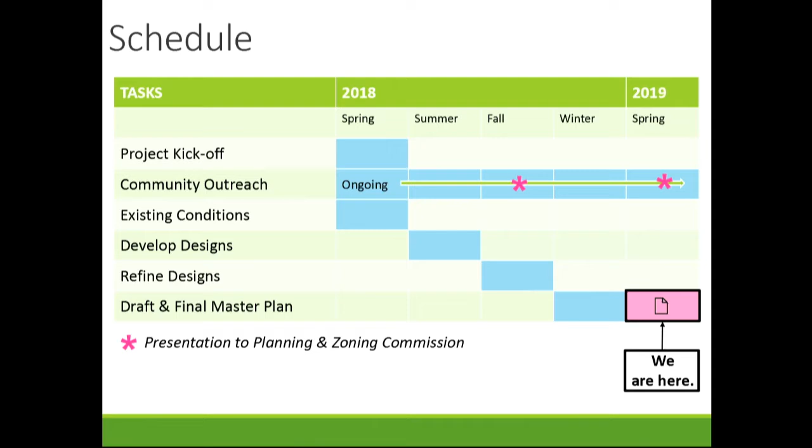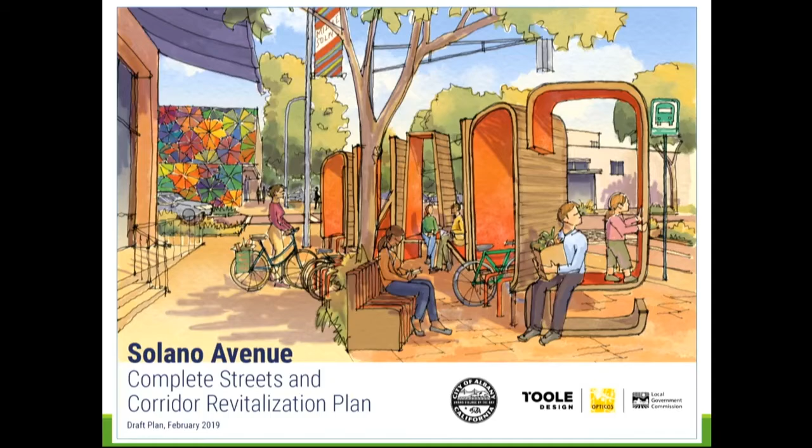So what I'm going to do now is provide you a walkthrough of the draft plan. The Solano Avenue plan is the culmination of about a year of outreach and planning work.

All of the elements have been pulled together into the draft plan, which includes an executive summary, a brief introductory chapter that discusses the process as well as the purpose of the plan and community goals. We also, in chapter 2, look into the existing conditions as well as the proposed corridor design and design elements. Chapter 3 is a unique chapter that provides a streetscape design palette.

These are ideas for the city and the community to think about as they work on implementing the plan. They are examples from other communities and include an array of design elements. The 4th chapter looks at implementation, so I'll touch on those as well in a bit more detail.

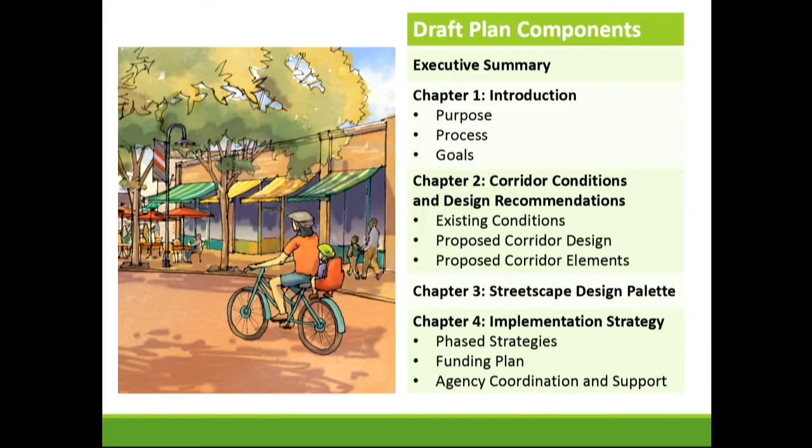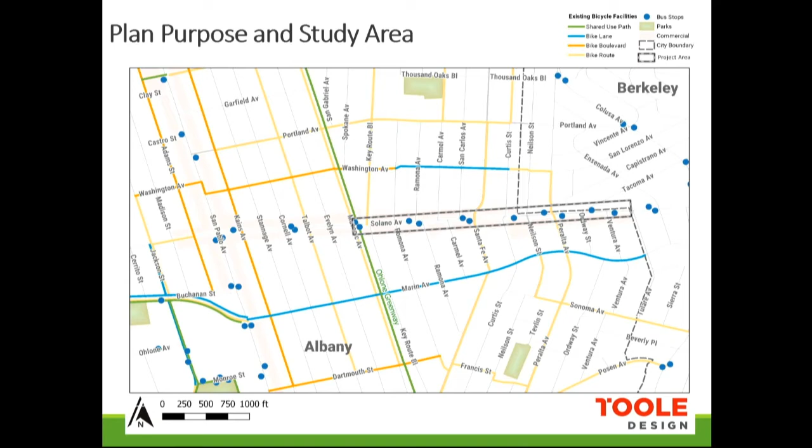The plan study area is Upper Solano Avenue, defined as Masonic to Tulare. This encompasses all of the right-of-way within the city of Albany, and to the east of the corridor is a bit of buildings in the city of Berkeley, but the city of Albany does own the right-of-way in that area as well. The plan was developed through multiple community outreach efforts.

We had a kickoff open house in May of 2018, and we also met with the Community Advisory Group at that time. In late September/October, we took the draft corridor design back out to the community with an event at Flowerland on Solano Avenue. We also had a pop-up event on Ramona Avenue, which illustrated hands-on some of the corridor design features.

We've also met with you, the Planning and Zoning Commission, and the Traffic and Safety Commission. City of Albany staff has been obviously very involved, but we've also been meeting with City of Berkeley staff, recognizing that this corridor plan does touch on some of their property as well.

We've also had a great team comprised of Toole Design, Opticos Design, which is a landscape and urban design firm, and a local government commission and outreach firm. So we drew upon all of the innovative ideas from the 3 firms and best practices in the field of planning, engineering, and urban design, and pulled that into the plan as well.

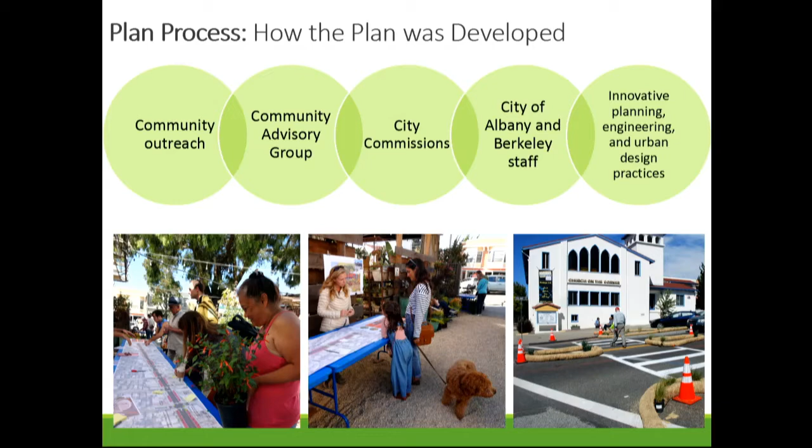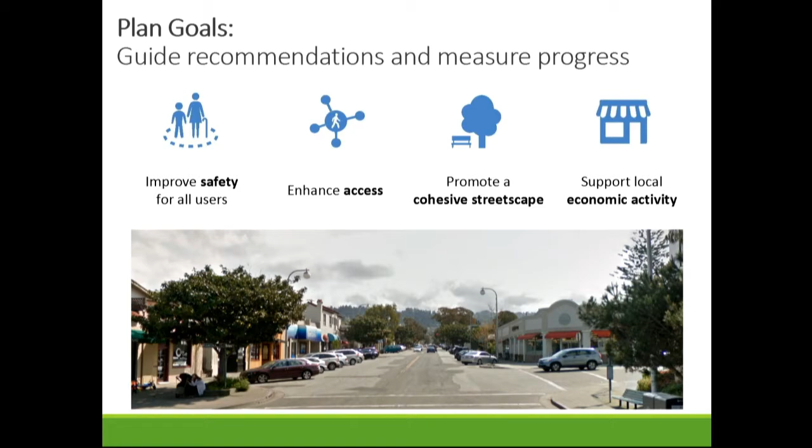The plan goals are to improve safety for all users, enhance access, promote a cohesive streetscape, and also support economic activity. These goals really came from the feedback that we got from the community throughout the planning process.

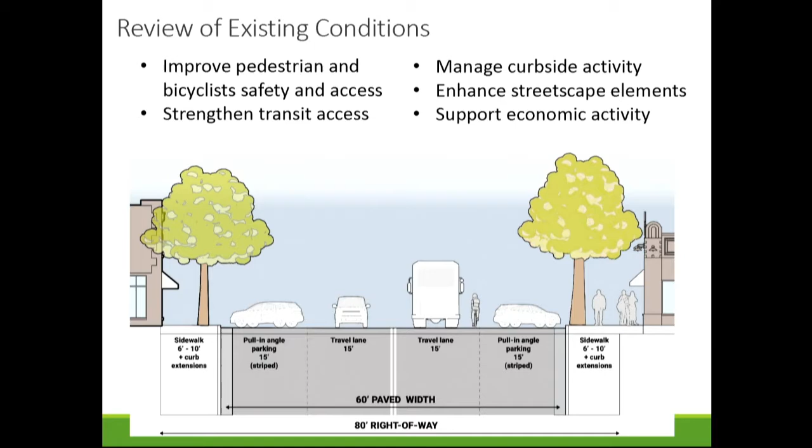Currently, there's a sidewalk that's at maximum 10 feet, and then pull-in angle parking at about 15 feet, and about 15-foot travel lanes on both sides. The existing conditions also take a look at the current conditions for walking and biking along the corridor, transit access, curbside activity, current streetscape elements, as well as an interest in supporting economic activity.

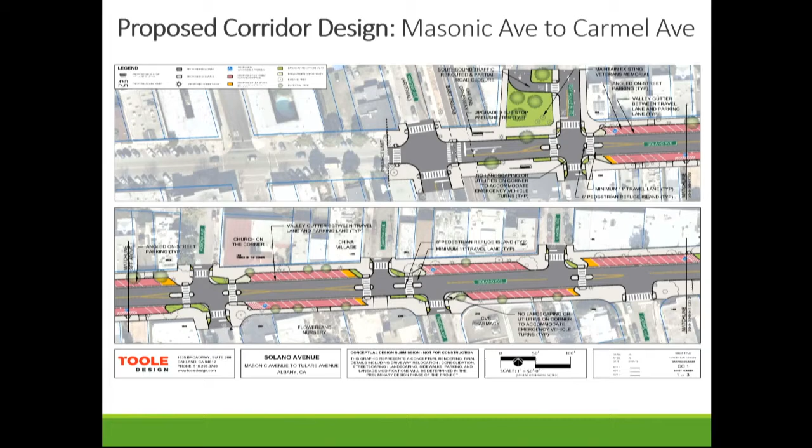This is the proposed corridor design. It encompasses, like we said, Masonic to Tulare, so it's broken up into 3 pages in the plan. The main themes of the corridor design are to enhance safety of pedestrians, which is where you'll see we've restriped many of the crosswalks.

We've enhanced mobility and accessibility by repositioning the curb ramps. There are also pedestrian refuge islands proposed for crosswalks that are quite lengthy. And we've also identified streetscape elements throughout.

So possible new tree locations, as well as different flexible spaces that could be used for public spaces like parklets or buslets. They could be used for in-street bike corrals or motorcycle parking. This is really an opportunity for different uses along the corridor in this area.

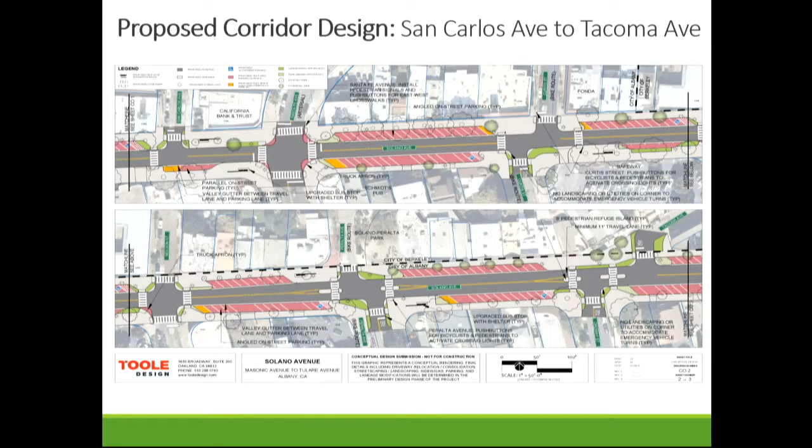This also encompasses extending the curb ramp so that narrows the travel lane for pedestrians and limits the exposure time as they cross the street, which hopefully limits their conflict with cars. We also look to widen the sidewalk throughout the study area, especially on the south side where there are many pinch points.

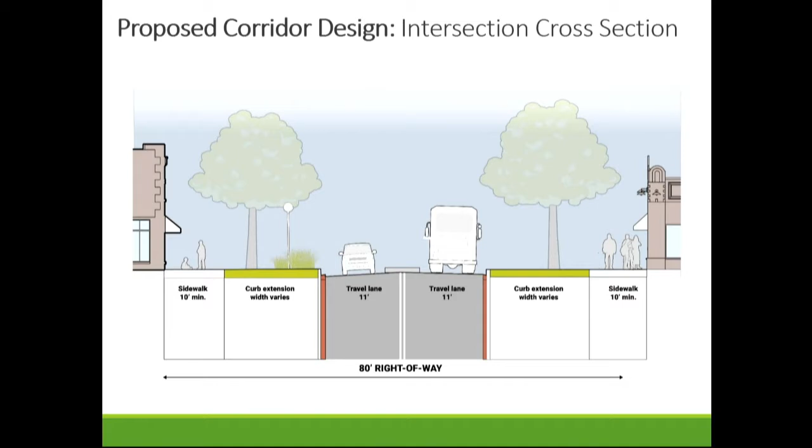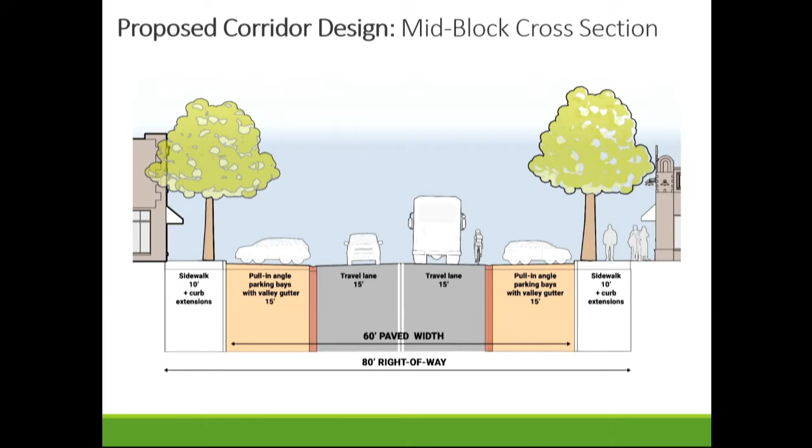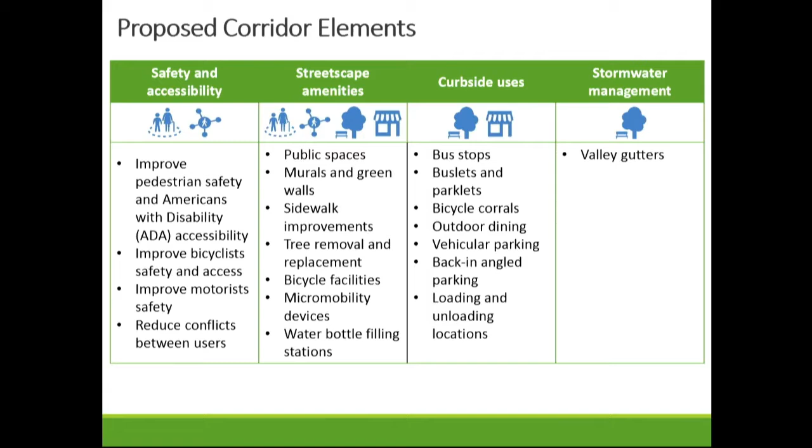We're also really excited to include a whole assortment of corridor elements that touch on safety and accessibility, streetscape amenities, curbside uses, and stormwater management. I'll touch on a couple here, but keep in mind there are more than I go through.

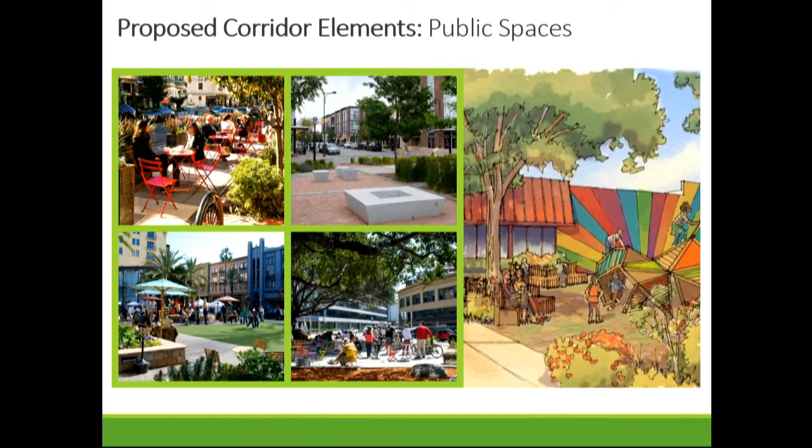One of the corridor elements we really highlight are public spaces. This image on the right is a possible new public space at Key Route Boulevard. There, we propose rerouting Key Route, which opens up a nice space that could be used for a park or other gathering place. We also identify other places for public spaces throughout the corridor.

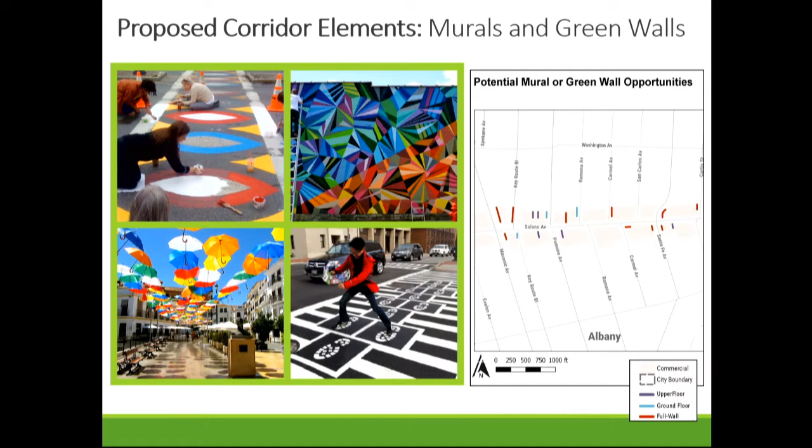We also identify opportunities for murals or green walls. These are currently blank walls that could be brought to life through murals from local artists, or could have green or living walls installed to enliven Solano Avenue and bring character to the corridor. We've also identified flexible spaces throughout the corridor.

When you look at the corridor design, keep in mind that spaces allocated for vehicle parking could also be used as flexible spaces for on-street buslets or parklets, similar to what's outside of Hal's Coffee in Lower Solano Avenue. They could also be used for outdoor dining at popular restaurants, and could be connected to bus stops with some really nice amenities.

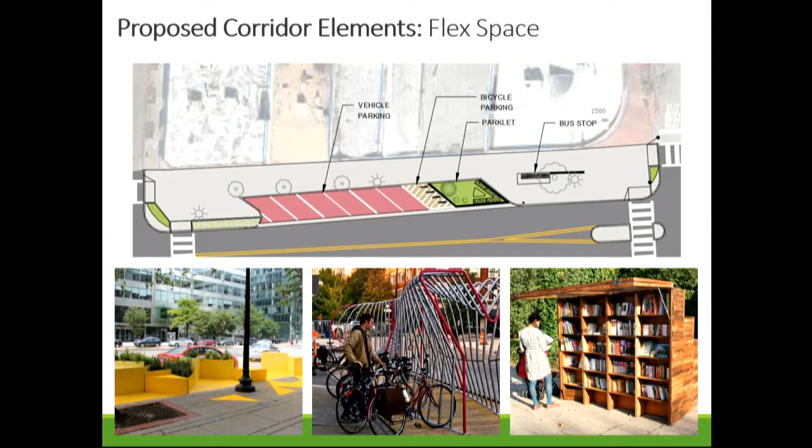These examples below are creative public spaces, and the one with the books is actually a creative bus stop. So you can use the space in a lot of different ways, including buslets and parklets as I mentioned.

Sidewalk improvements are a key element of this plan as well. This is on the south side of Solano Avenue. As I mentioned, there are many pinch points, and in many locations, trees have uprooted the sidewalk, causing tripping hazards and difficulties for people with mobility impairments.

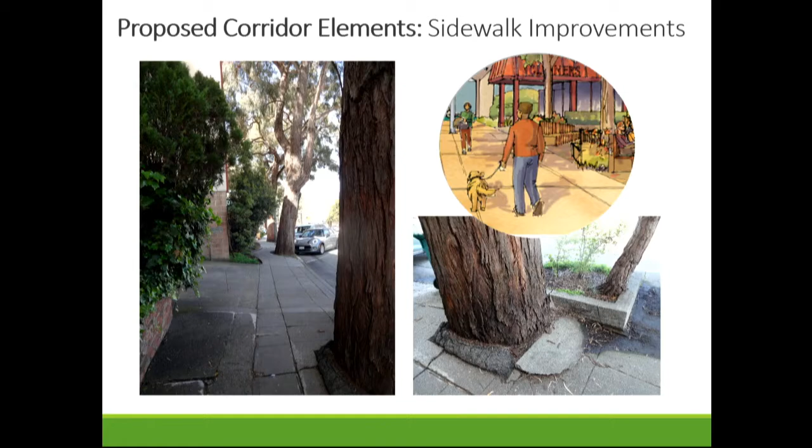So the city is also, in tandem with this project, working on a tree inventory. A certified arborist has been hired to look at the different types of trees on Solano Avenue and provide feedback on which trees may be candidates for removal or which should remain, and what would be ideal urban streetscape trees to plant in the future.

We also address bicycle facilities in the proposed plan. The policy guidance the city has provided through the general plan and active transportation plan is that bicycle facilities should be accommodated on Marin Avenue and Washington Avenue, both parallel to Solano. So our plan focused on providing bicycle amenities across Solano Avenue.

At Peralta Avenue and Curtis, those are both identified bike routes. We've proposed enhancements such as rectangular rapid flashing beacons - the top right picture shows a beacon in Berkeley. This provides enhanced visibility for bicyclists as they cross Solano Avenue.

We've also identified different locations with flexible spaces for in-street bike corrals. You'll see a photo of that down below as well.

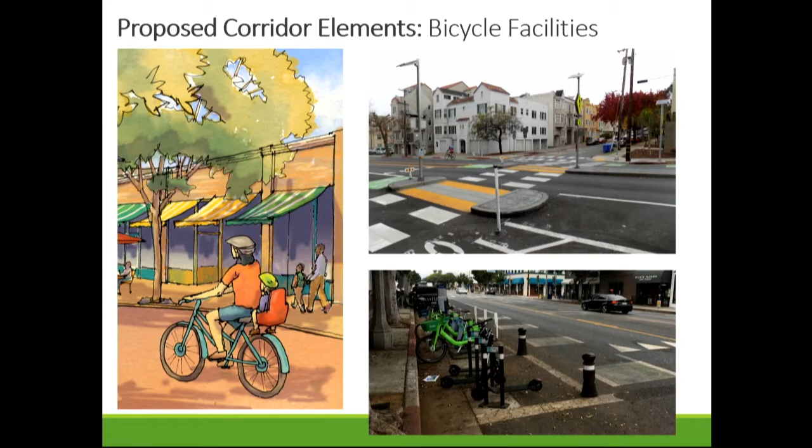For parking, the current design increases the number of parking spaces. This is largely due to an analysis from AC Transit recommending removal of 3 bus stops - stops that don't have high numbers of boardings or alightings - so we're able to capture those and use them in a variety of ways, including regular vehicle spaces. We've also added 4 accessible vehicle spaces, including 2 van-accessible spaces, and 13 of these flex spaces. These are all new additions to the corridor.

There's also been a lot of conversation about the possibility of exploring back-in angled parking as part of this plan. The feedback city staff received from the city council is that this is an element that can be considered as part of the next stage of design work.

Right now, this is very much a concept design. In order to implement this plan, it would need to move forward to engineering design, meaning that while all these recommendations fit within the right-of-way, it would get a bit more technical before it could be implemented on the roadway.

The city is interested in pursuing the possibility of a back-in angled parking demonstration to get more community feedback, which could then be incorporated into the next phase, the 30% engineering design phase.

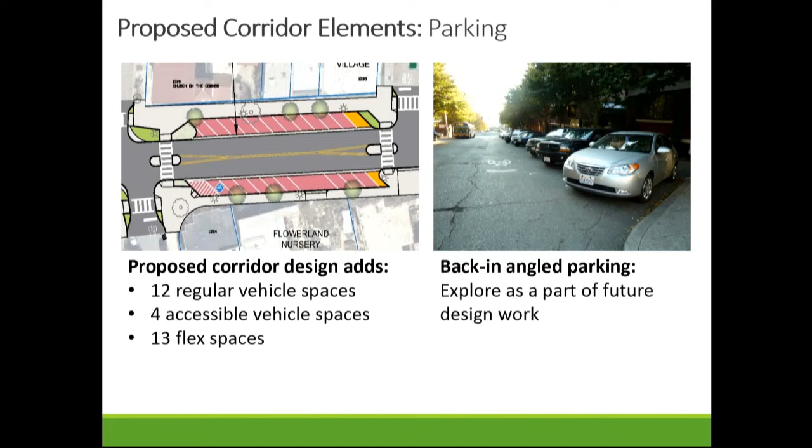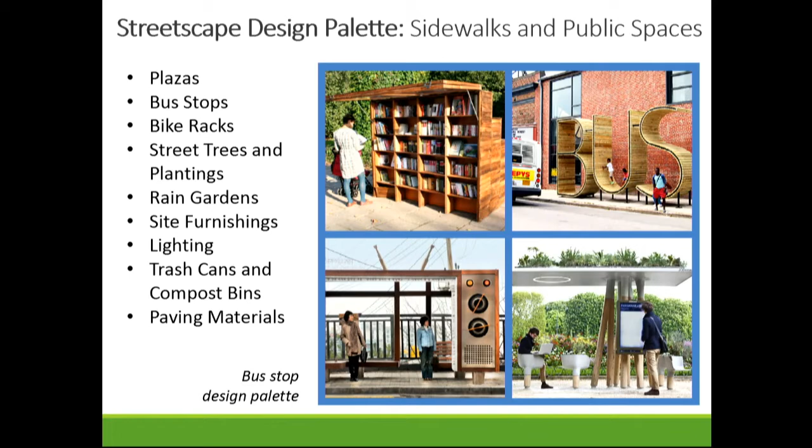We also have a lot of recommendations around sidewalks and public spaces, including the design palette for bus stops as well as rain gardens. There are many locations throughout the corridor identified in green on the corridor design that could be landscaped, which can be expensive to maintain. So there are also opportunities for rain gardens, which provide really high quality stormwater management but aren't as expensive to maintain as fully landscaped medians.

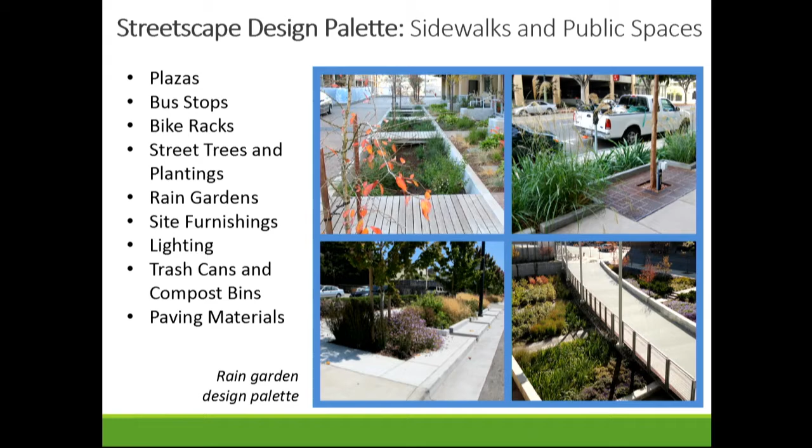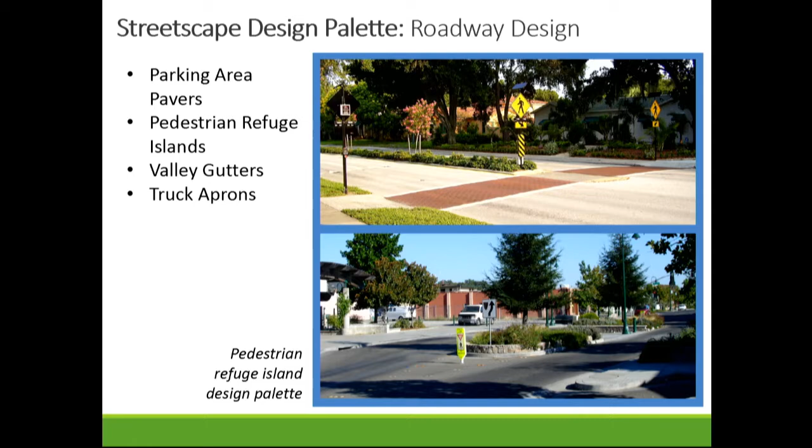For the roadway design section of the design palette, we provide some examples of pedestrian refuge islands. Throughout the corridor, these are proposed to limit pedestrian crossing distances and exposure, and here are some examples of different types.

We also recommend the use of truck aprons—raised, paved areas at intersections. They're quite uncomfortable for personal vehicles to mount when turning, but no problem for larger trucks or emergency vehicles. These are recommended for locations where we see high truck volume. We used a system called AutoTurn to analyze whether trucks can make this turn, and they are able to with the addition of truck aprons. This also serves to slow down and act as a traffic calming element for motorists.

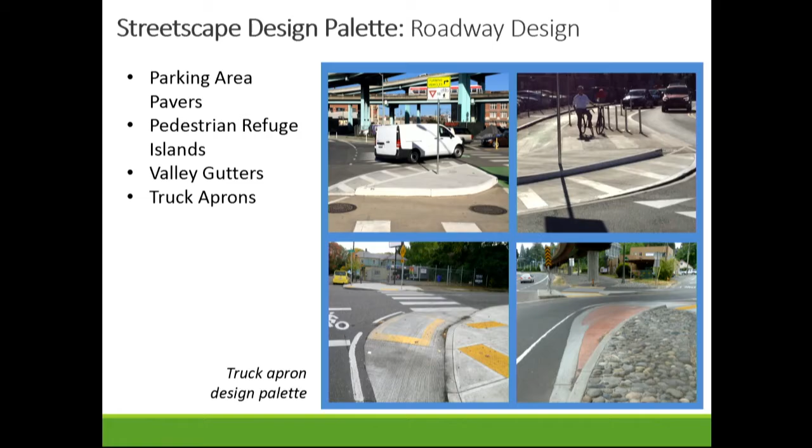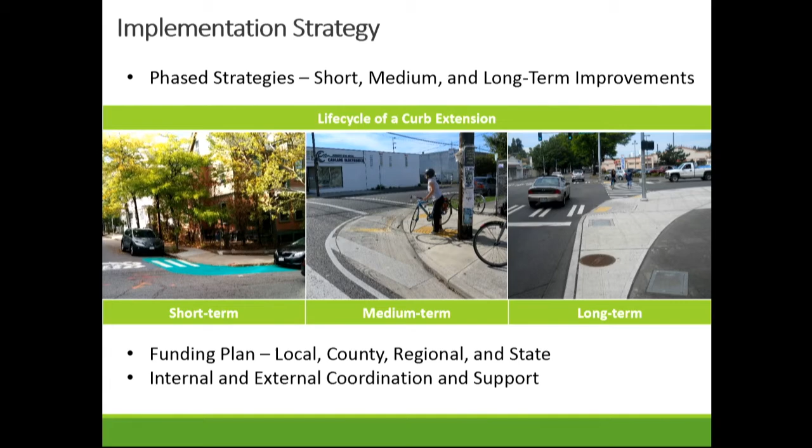To give you a sense of where we are and where we're headed, the public comment period is currently open on the draft plan. It opened on the 11th, as Ann mentioned, and will close on the 11th, so we have a month of public comment. We encourage all community members to provide comments to city staff about the plan, as well as commissioners—don't feel like tonight's your only time to share feedback.

As I mentioned, we'll be going forward to the Traffic and Safety Commission, and then the plan is tentatively scheduled to be reviewed by the council on the 15th.

After the plan is adopted, as I mentioned, this is very much a concept design, so the corridor design will need to move forward into an engineering design. This is very typical for planning projects like this—the city has an example with the San Pablo Avenue plan, which started with concept design and is moving to the engineering phase. The city will be working on securing funding to pay for the engineering design work, and that will be the next step in this process.

The plan can currently be found on the SolanoCompleteStreets.org webpage, and this is also Ann's contact information—you can send comments her way. Thank you very much.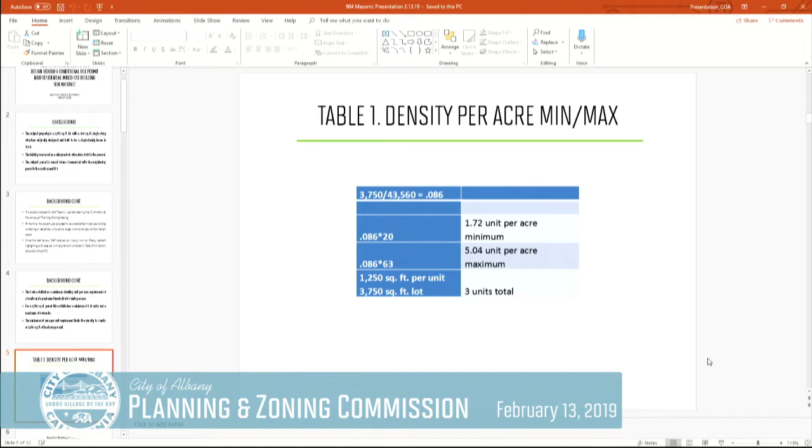So let's see, sorry, can you talk us through what we're seeing here? 1.72 units per acre. Yeah, so basically, if you took a 3,750 square foot lot, your minimum density is 1.7 units per acre, that's the minimum. Your maximum is 5 units per acre, and then again, you still have all these other development standards you're looking at in terms of lot coverage, building height, floor area ratio, off-street parking.

And just to clarify, two questions. One is when we round up, 0.5 and above, we round up in terms of the minimums. Is the point of that to make sure people don't underdevelop lots so they don't put one huge single-family home on this lot? For example, you have to at least put 2 units on this lot?

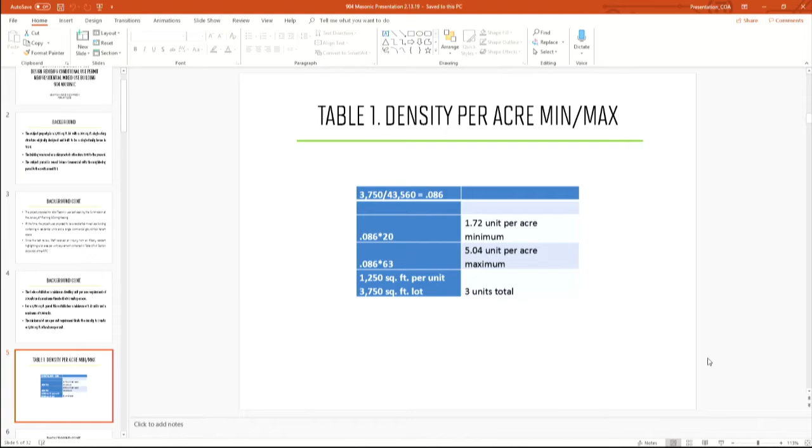Is there any discretion, or is that something that can be waived or modified by the commission, or is it black and white that you just have to comply? In the context of your discretion, you would be able to work through that. But there's a certain sort of certainty that somebody's coming in and says, here are my bookends of density allowed on this site.

Just to clarify, it's not actually 1.72 per acre, it's 1.72 per 3,750 square feet. Correct. So on that lot, you would need a minimum of 2 units, up to 5. You'd be entitled by right to a minimum of 2 for new development.

Well, I can see that might be appropriate for the commercial districts, but having a minimum lot area per dwelling unit is not necessarily appropriate in the residential districts, right? You can say that. If someone had a large lot in R3, and there are some, and they only want to put one home on it, that happens all the time. There are many R2 lots in Albany that have one home on them.

Spoiler alert: at the next meeting you'll actually have 2 duplex applications before you, on 2 different properties in town. Would they be affected by any of this?

Can you have a motion? Unless you have other comments, I'd like to try to get comfortable with where we're going. Okay, go for it.

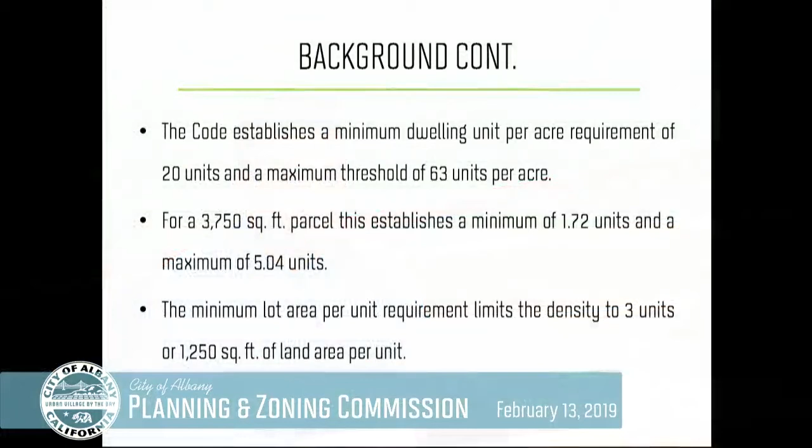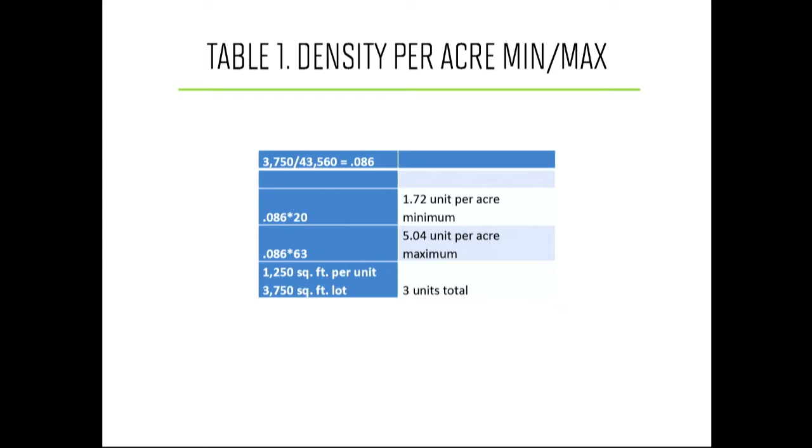Since the last review, staff received an inquiry from an Albany resident highlighting the lot area per unit requirement in Table 2A of Section 20.24.020 of the Albany Municipal Code. The code establishes a minimum of 20 units per acre and a maximum of 63 units per acre. For a 3,750 square foot lot, this establishes a minimum of 1.72 units and a maximum of 5.04 units. The minimum lot area per unit requirement limits density to 3 units, or 1,250 square feet of lot area per unit. Here's that same table showing the density breakdown and the conflict with the lot area requirement per residential unit in the zoning district.

Staff verified that there is contradicting language and intention within the code. A strict interpretation limits the density for the proposed project to 3 units based on a 3,750 square foot lot. This existing restriction effectively limits the allowable project density.

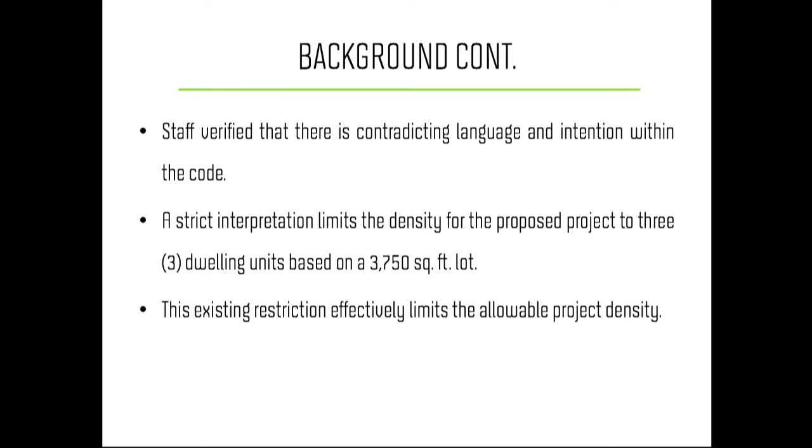Looking at Section 20.24.020, Table 2B, site regulations for non-residential uses, there are 2 sets of requirements that contradict each other. One row calls out maximum density permitted in the Solano Commercial Zoning District, while another calls out a minimum lot area per dwelling unit with reference to subnote 3. Subnote 3 takes you to the residential table and subnote 9, which indicates dwelling units are required to have 1,250 square feet of lot area, or 3 units on a 3,750 square foot lot. This is how the table looks today.

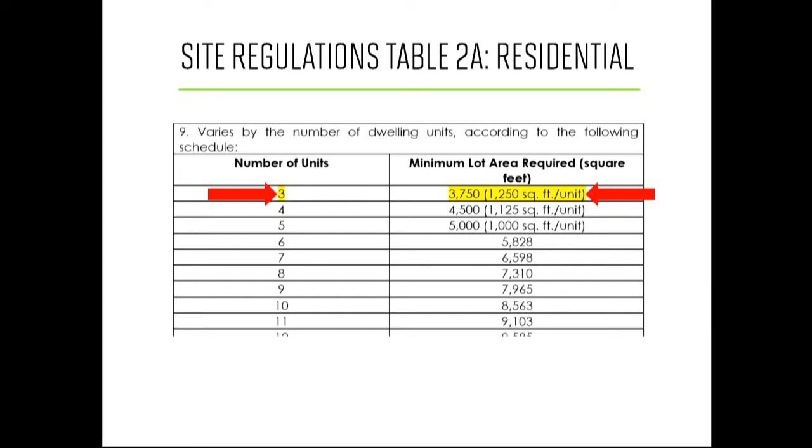Going back to that table, once again, 3 units on a 3,750 square foot lot. After notifying the applicant of the zoning code provisions affecting the project, the application has been revised to include a 3-unit scheme for the proposed project. This reduction in dwelling units brings the project into strict compliance with the zoning code. In addition to the unit reduction, the applicant has also addressed various commission comments expressed at the January 9th hearing.

As you know, amendments for the density provisions in the zoning code have already been initiated by staff and the Planning and Zoning Commission. Should the changes be adopted by the City Council, the number of units permitted in the SPC zones would be based on density minimums and maximums without further restriction. The current code limits the number of dwelling units permitted in the SC and SPC zoning districts based on a minimum lot area to unit threshold. However, the FAR, setbacks, and height limits are exactly the same.

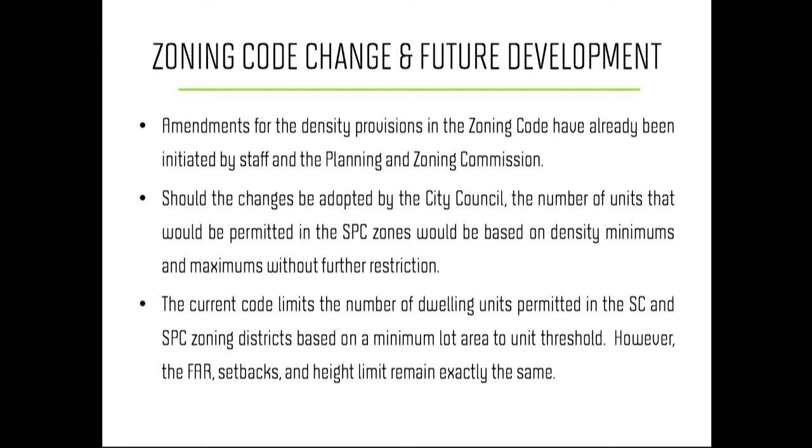Thus, as the code reads today, and as is the case with 904 Masonic specifically, the developer could build a 3-unit residential mixed-use building at a maximum build-out. However, they could not develop a 4-unit residential mixed-use building within the same exact building envelope due to the lot size restriction. The code is proposed to be amended and scheduled for City Council action to eliminate the lot area requirement.

With that being said, the applicant intends to amend the application once the code change becomes effective to include a 4th residential unit. In the interim, they are pursuing this 3-unit scheme so that they may commence with the building permit plan check. If the code changes are adopted, the applicant will return to the Planning and Zoning Commission with an amended application and a request for a parking reduction to accommodate the 4th unit.

The project request as presented to you tonight is design review for the residential mixed-use building and a conditional use permit solely for the stairwell projection on top of the roof.

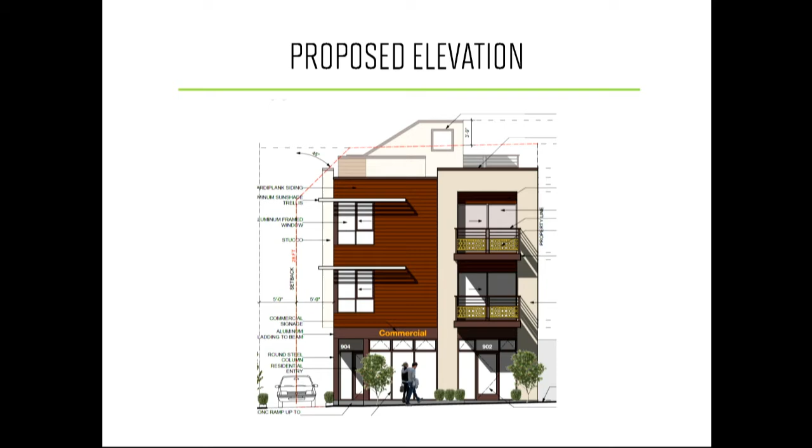Building programming: on the ground level, the commercial tenant space is proposed to be a 1,391 square foot tenant space with a single ADA all-gender restroom, an entry lobby, stairwell to the dwelling units, off-street vehicle parking, bicycle parking, and trash receptacle storage. On the second level, it's proposed to be two residential units, each containing 2 bedrooms, 1 bathroom, and each 752 square feet with private balconies.

On the third level, 1 residential unit with 4 bedrooms, 2 bathrooms, and a total of 1,504 square feet with 2 private balconies is proposed. And then lastly, on the roof level, an open rooftop deck with planters, outdoor furniture, and barbecue is proposed and will be accessible to all residential tenants.

There is still a usable open space requirement for the project. The zoning code requires that multifamily dwellings of 3 units or more provide 200 square feet of common usable open space per unit. The required common open space can be reduced by providing private open spaces for each unit. The applicant is proposing open space in the form of the rooftop deck.

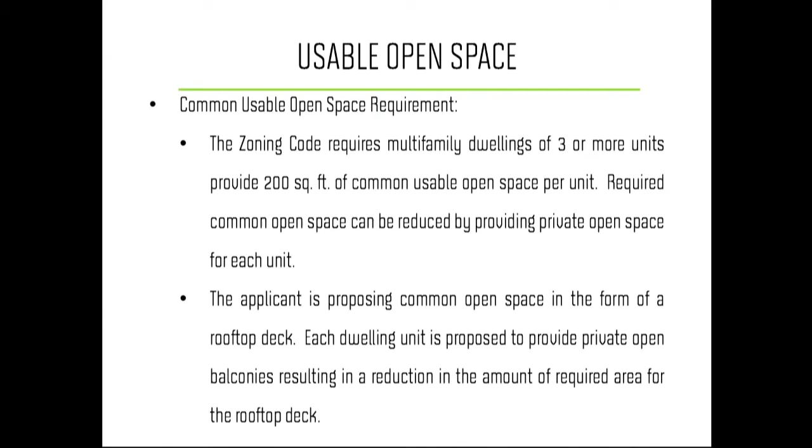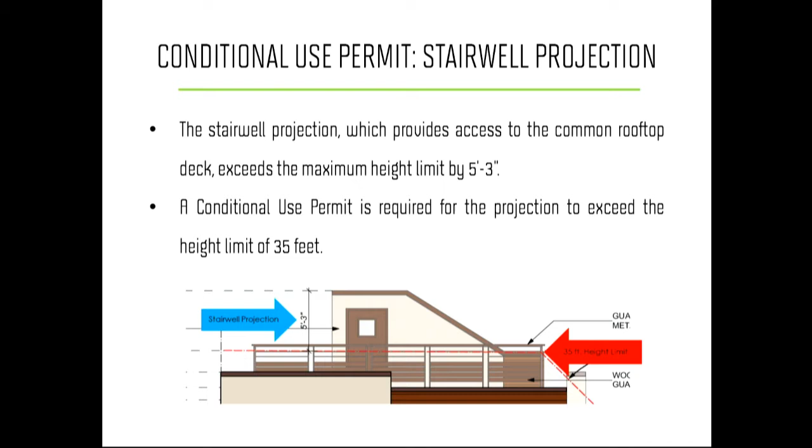Parking, the required parking. So required parking for this project is as follows. The residential component dictates 1 vehicle space per dwelling unit and 1 bicycle space per unit, so 3 vehicle, 3 bikes. And the commercial component dictates no off-street vehicle parking, and 1 exterior bike rack is required to accommodate the commercial tenant space.

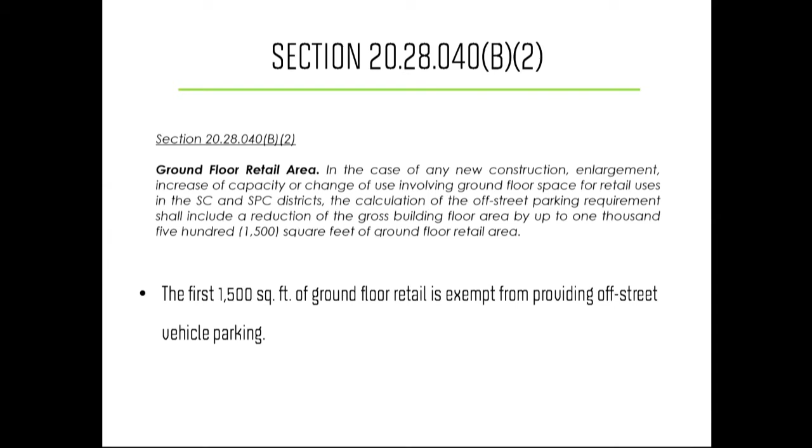And then project refinement, lastly, these refinements have been made in regard to the commission comments made on the January 9th hearing, and that includes a reduced dwelling unit count from 4 to 3 units, shifting the entire building to create a 5'11" front yard setback, which was previously 7 foot 5 inches.

They added an additional covered bike parking space for a total of 4 parking spaces. An additional bike rack on the sidewalk was provided in front of the building on the public right-of-way. The interior ceiling heights have been modified to accommodate a 10-foot commercial ceiling height.

The second and third floors and roof framing, the structural thickness has increased from 12 inches to 13 inches for engineering purposes. The rooftop staircase projects a maximum of 5 foot 3 inches above the height limit, which was previously proposed at 4 foot 5 inches.

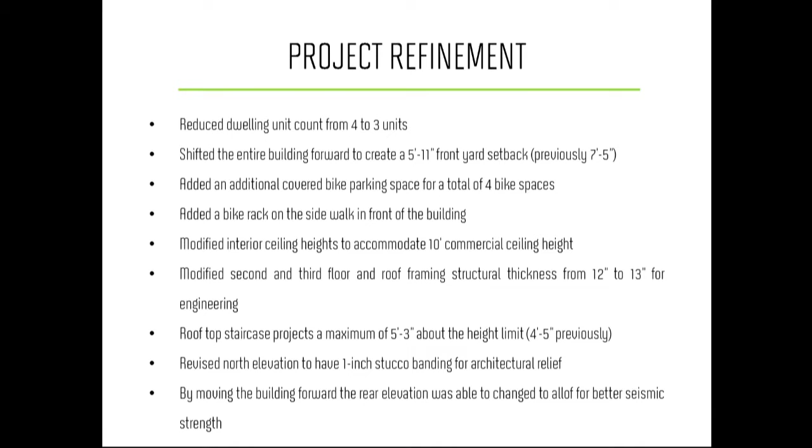The revised north elevation is now to include a 1-inch stucco banding for architectural relief and complementary paint colors as well. By moving the entire building forward, the rear elevation was able to be modified to account for better seismic strength in structural design. Staff has received 2 correspondences, which was emailed to you guys earlier in the day.

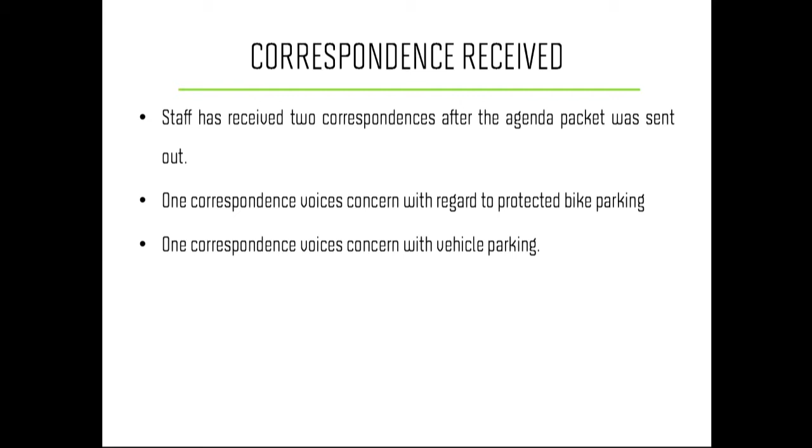One correspondence voices concerns with regard to the protected bike parking, and one voices concern with vehicle parking. The project is categorically exempt per section 15332, infill development projects. Recommendation: staff recommends that the Planning and Zoning Commission review and approve the proposed plan subject to the attached findings and the conditions of approval.

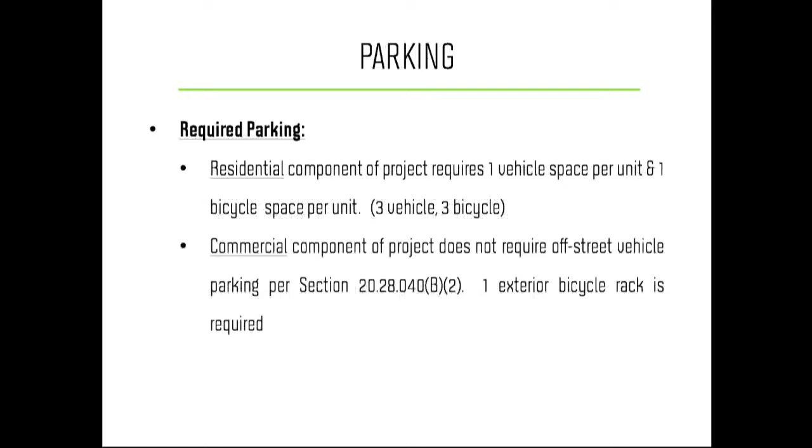And with that, we are happy to answer any questions you guys have. And the applicant is also here tonight to present the project refinement. Any questions? This is the staff report. With that, we'll turn it to the project sponsor for a presentation.

My name is Richard Tapp. I'm the architect for the project, and Christopher's gone over most of the revisions that we've done. What we tried to do was respond to the zoning amendment issue, which we have done, and we've done that very openly. We've been open with staff about it, and we wanted to make sure we were open with the Commission and also the public as well.

So originally we submitted for the 4 units, and that's what we were told we were allowed by city planning staff and by the current zoning code. And then the old table from I think 1970, 50 years ago, had this conflict. So if the wheels of government turn slowly, it'll take about 3 months, I think, for the zoning amendment to go through. So what we decided to do was go ahead and get approval for the 3 units.

The envelope has not changed. So the size, the bulk of the building has not changed at all. What we did do is we took the top unit and we created a very large 4-bedroom unit, and we did it in the minimal way that would affect the actual construction, but it still actually works as a 4-bedroom unit.

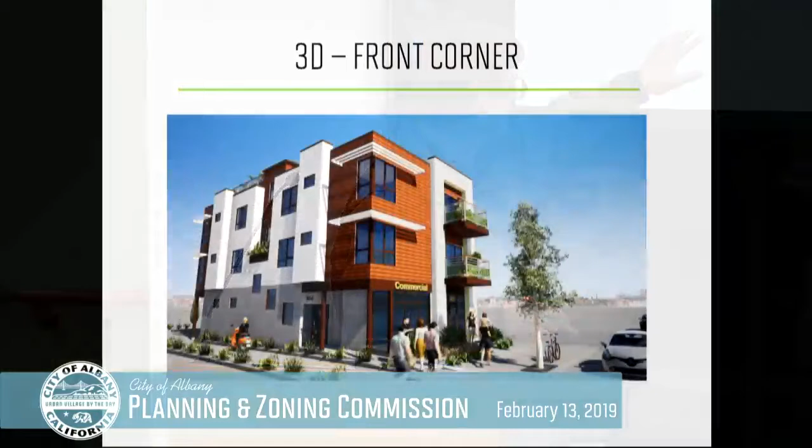Let me just see here. Oh, and then the other thing we did was on the northern side. If we could stay here, Christopher. As far as the height issue goes, this is the front corner view, and you really don't see the sloping roof from this angle, nor do you from the front or from the rear.

You do see it from the side from a long way away, but we did slope it. We respected the setback for the residential, which is 10 foot on the adjoining residential lot, and you go up 28 feet at 10 feet, and then you go over 45 degrees. So we respected that, and then we followed that 45 degree slope, and we followed a similar slope on the stair.

As far as the graphic in your packet, it indicates that the railing encroaches, and it does at the rear, but at the front it does not. If you looked at the front elevation and the side elevation, the railing doesn't project into the 35 feet. There's a slope down from front to rear, about a 2-foot slope from front to back of the property, and there's also a cross slope on the sidewalk going from north to south.

So when we're pinpointing it, 5 foot 3 inches is actually the maximum that we encroach. In other areas we encroach less. That's the encroachment issue. And then the other thing is, by moving the building forward, if you have the rear elevation, Christopher?

So what happened here is, by pushing the building forward 18 inches, we're actually able—before, the original design had circular steel posts here, here, and here. By pushing the building forward, we're able to use that distance to bring a blade wall down, which is a strong wall post, and it gives much more seismic stability to the rear. It also matches the front.

Can you flip to the front? Yeah, so these elements continue down at the front, so the rear now matches the front in design concept. We weren't able to take full advantage of the bump out, so what we did is take the wall down—the bump out still occurs, so there's a shadow line at the second floor.

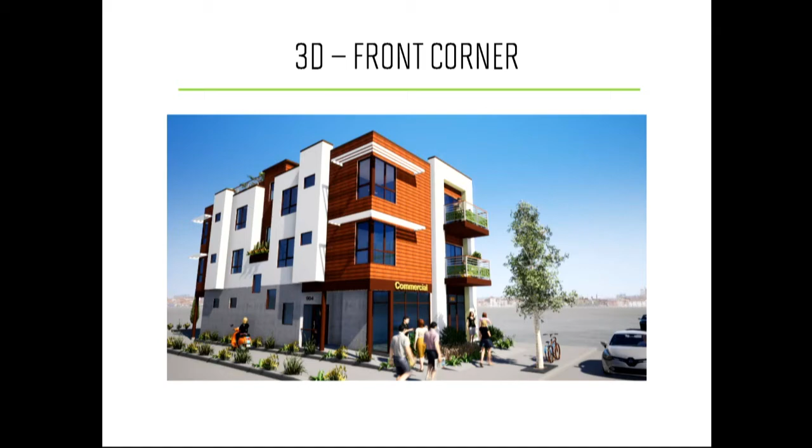Then as far as the other comments, we're proposing unbundled parking, meaning the parking is not designated to any unit. So if one unit's spot is empty, one of the other tenants can come in and use that space. This means the parking will be much more usable. If someone is commuting to the city all day, a designated space would sit vacant, but in this case, it'll be used.

As far as the roof deck goes, we decided not to go with physical planters where everything is built in. The trellis would increase the encroachment on the setback, so we decided not to do that. Rather than build in fixed planters that cause maintenance issues, drainage issues, and quite often leakage, we decided to go with more of a pot plant approach.

If during the staff review they wanted to designate areas where the pot plants should go, we can accommodate that.

On the roof plan, we wanted to make sure there was ample planting and vegetation on this side, so it gave a buffer to the residential on the south. The rest of it is furniture, which can be moved around, but we did relocate the barbecue so it's back towards the stair.

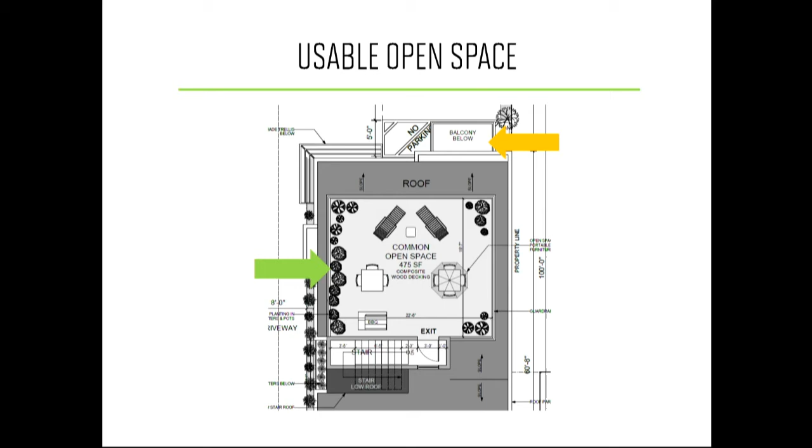It's a propane barbecue, not gas. As far as utilities on the roof, there will be water for irrigation, a hose bib for cleaning and maintenance, and an electrical outlet. There was a question in a letter from Mr. Pipkin about what utilities were on the roof deck, and we would make sure the lighting is directional and downward pointing so it isn't a distraction or glare to the neighbors.

As far as the trees in the parking area, there was a comment by the chairman about not having trees in the parking, but we have about 6 to 8 trees in the parking lot. We don't have anything separate in the middle because we don't have space, but the idea is we're looking at doing pencil pines in concept so that they're a vertical tree element rather than something broad, because the parking is very tight.

The window framing details and the depth of the windows, etc., will be part of our building permit submittal and reviewed by staff.

Also the permeable paving — that's something we haven't got our drainage plan for yet. We'll have a civil engineer do the drainage plan, and at that time he'll propose something we can work with staff on, but we'll have permeable paving. I just don't know where it will be and what makes sense.

Yeah, so you see the bicycle parking there. What's shown doesn't match what's on the plan for the southwest corner. The plan shows area for a trash can enclosure, and then bike parking next to it—but you're not seeing the trash can enclosure there. Also, the bike parking shown doesn't seem to meet the code.

The Albany code requires bicycle storage to be protected, individually enclosed, and secure for each bicycle—this includes bicycle lockers, electronic lockers, and interior bicycle parking. I'd ask that you request a better rendering of what's actually proposed, something that complies with the code. I'm certainly excited to hear the applicant plans to put in even more bike parking or stacked bike parking, because this is obviously a great spot for people to get around by bike from.

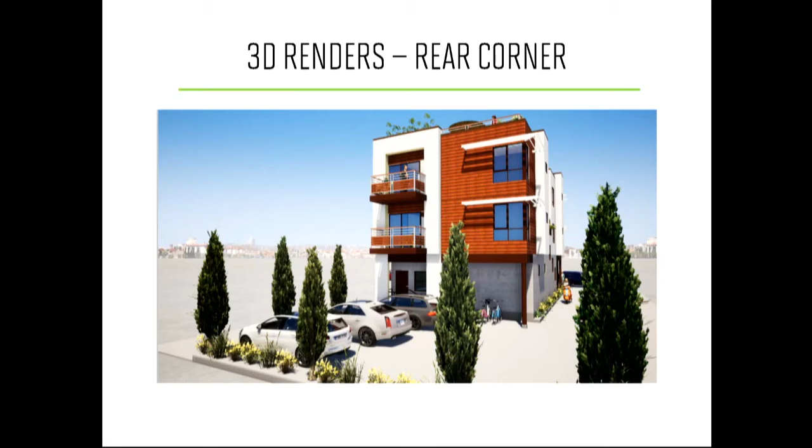Stepping to the mechanical systems and appliances—I don't know if you received the message I sent a couple weeks ago regarding the need to prohibit natural gas in new construction in Albany if we're going to meet our greenhouse pollution reduction goal. Pretty much all the resources out there say if you keep installing natural gas in buildings, you're going to torpedo your ability to meet these goals, which for Albany is, I think, a 60% reduction by 2035, if I recall correctly.

I think this is the first building coming in since we've made these properties more valuable by reducing parking requirements. It's fair to say we cut the parking requirement in half, or perhaps more depending on whether you grant this building an exception. It used to be 2 off-street parking spaces per unit—Measure N1 reduced that, or gave the council authority to reduce it. So we've increased the value of these properties pretty dramatically.

I think it's reasonable to say we want these buildings to be all electric. Obviously this application came in under the existing code, so all I can suggest is that you encourage the applicant to look at that. For new builds, my understanding is all electric is getting pretty close to cost competitive with natural gas, because you save on piping and everything else, and heat pump technology has come a long way.

As far as future buildings, there have been two larger developments proposed, or at least brought to you for early discussion, that seem to be made possible by the parking reduction. I'd really hope you'd look at changing Albany's requirements to prohibit natural gas in new buildings before those come along—one is a 9-unit townhome project, another is an 18 or 20-unit project on San Pablo, depending on how it comes in. It'd be really unfortunate for Albany if natural gas got locked into those. Thank you.

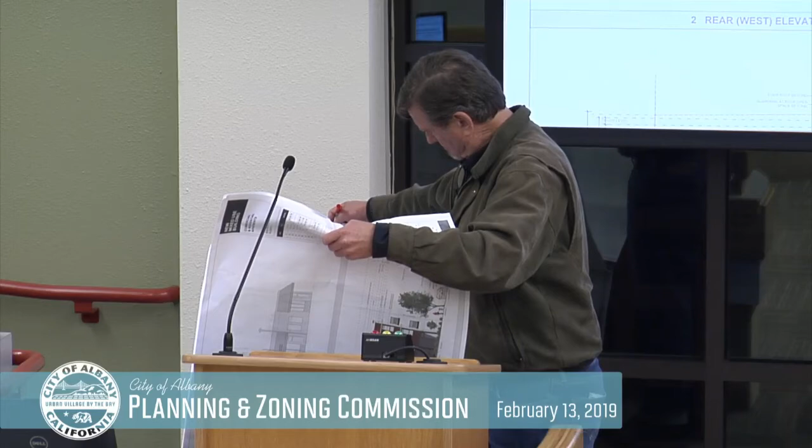So we could look at doing the cement board on that area, but it's primarily a cost issue. The building's already pretty expensive with all the ins and outs and balconies, etc. We also have a substantial art project we have to do, and cost factors into the developer and into the rents you end up having to charge people. So we want to make sure the north facade looks good from Solano Avenue, definitely don't want it to be a detriment. I thought the banding was a good solution with the stucco colors, probably a little better than just the reveals. The reveals work very well up close, but from a distance they'd be lost. By doing the banding with colors on colors, shade on shade, we create more of a shadow look.

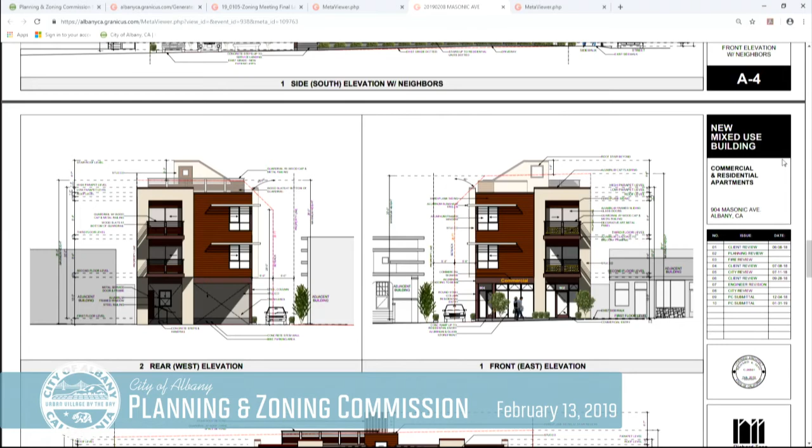Could I ask you a question again? Have you thought about permeable paving, and have you costed that out? Is that a big additional cost item?

Well, we'd looked at permeable paving for about three-quarters of the driveway. For the rear parking area, we'd looked at either permeable asphalt or concrete, but I'd rather go with permeable asphalt for the part where the cars are. Then the paving would go down on the residential side, about three-quarters of the way down, and then we'd do a transition. So if we do pavers for the whole parking area, it becomes a maintenance issue, but also a significant cost issue.

One thing I haven't mentioned to Adam, the owner - we could look at doing something on the top banding area, the top third of the building, where we did a green wall with a metal grid and vines growing on it. We could work out irrigation from the top going down, and that wouldn't be a major expense. I don't think the fire department would have a problem, though anything on a zero lot line they look at closely - I don't know if they'd say it's flammable or combustible, but we could look at that. It would be an enhancement at a reasonable cost, and if it's built over, it's not a waste.

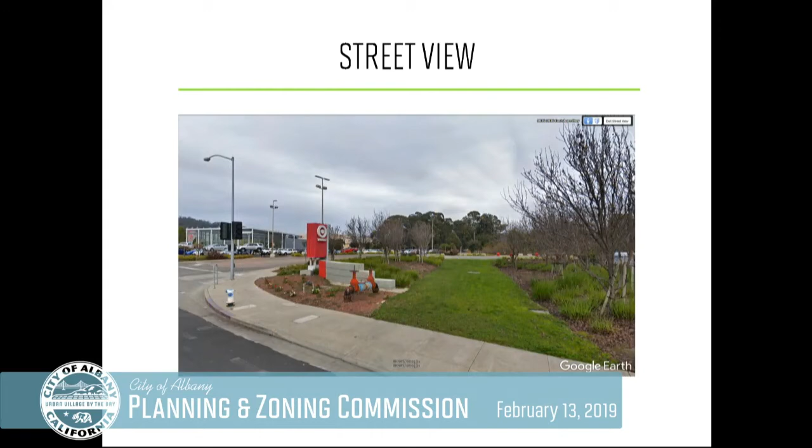Their proposal tonight not only increases the visibility with the overall proposed height, but it would also allow for signage for separate tenants.

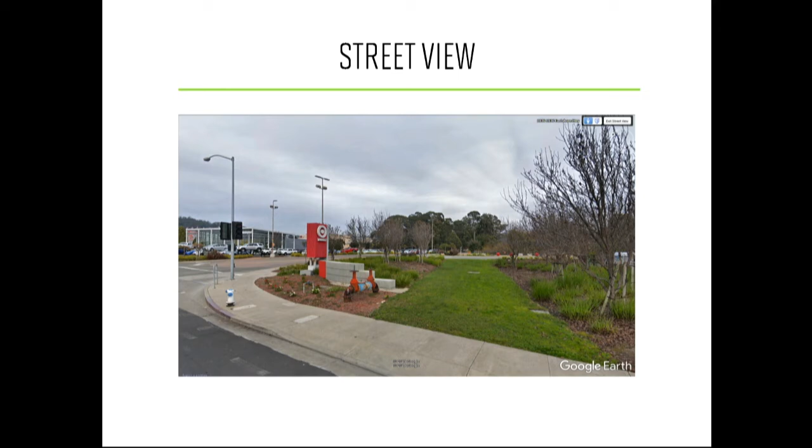Again, the project was approved in 2003 with several entitlements, including an EIR, conditional use permit, design review, a parcel map at that time, and a variance for the height limit. As part of this request, Target has identified the need for increased visibility within the I-80 corridor as their basis. They also cited concerns regarding the Gilman interchange upgrades that would affect their visibility for future customers to the store.

Within the sign section of the zoning code, we have definitions for both freestanding sign and shopping center. This fits the definition for freestanding sign, and this ultimately is a shopping center. There are a couple tenants within the store, including CVS, Starbucks, and Pizza Hut, and when that resultant parcel is sold off, that will be a 5th tenant.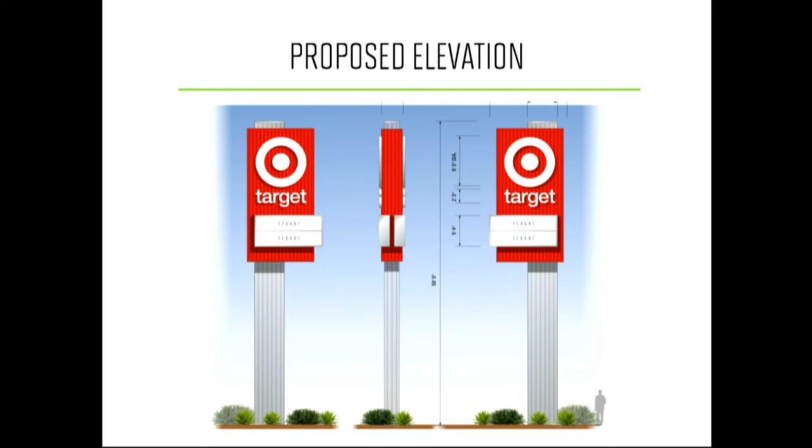This is a rendering of the sign as proposed. It is 50 feet tall. It effectively takes that monument sign, puts it to the top of the pylon, and then provides additional sign shells for future or existing tenants within the store. But this is the limitation: it would be for 2 tenants.

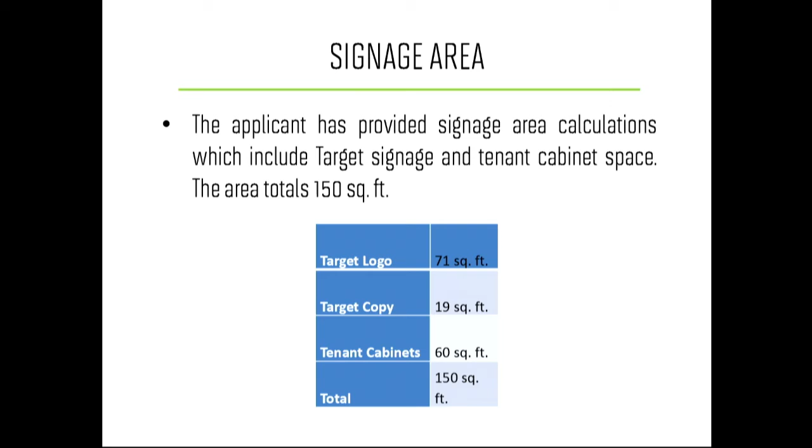Based on how the applicant has structured this request, the Target signage and tenant signage totals 150 square feet, so the Target logo and copy would obviously be the predominant signage one would see. This goes back to the shopping center definition for a freestanding identification sign, which sets a size threshold of 150 square feet. Target designed this to fit within that development standard.

So this is the interesting part for the commission. You have complete discretion in architectural review. The code is a little vague, other than you have the right to prescribe your review on a case-by-case basis, so you don't really have a lot of direction within the code or any policy document that might address standards for signage.

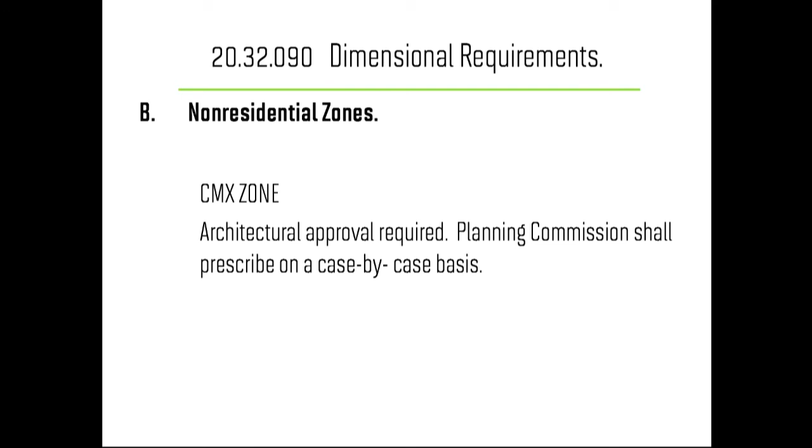So this is why we're bringing it to you tonight as a study session item. I think the other concern is that this would set a precedent as one of the tallest signs in the city. For comparison, the Golden Gate Fields sign is 65 feet in height, but it's obviously quite a bit different.

It's a larger sign, and it also has animation, if you will. So given that you have this broad authority for architectural sign review and the precedent-setting nature of this request, we're seeking your guidance before proceeding further.

We have not received correspondence in regards to this project, and the project is categorically exempt under CEQA. With that, we're asking just for general guidance as to how to proceed, given that you have discretion over architectural design.

Can I ask, when was that Golden Gate Field sign approved or installed? I think it was a long time ago. That's what I think too. Yeah, I'm just curious, maybe there aren't any different standards that would apply, maybe it's just complete discretion, but I'm basically wondering if that is a non-conforming sign or if it's something that theoretically could be approved today.

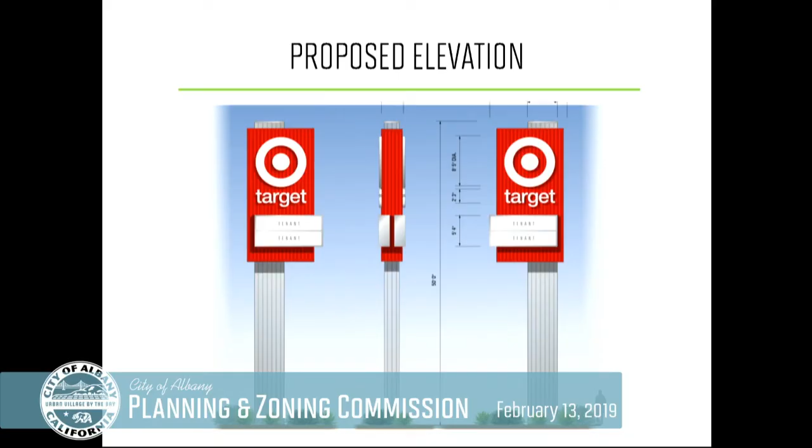Having said that, I'm also a little curious about the size of the sign, because we said 150 - could you pull up the rendering? It says 11 feet wide, and then how tall is the red box? Do we know, or do you have a dimension for that? The dimension's not specifically called out. Well, it looks like twice as tall as it is wide, so something like 20 feet.

I mean, how are we deciding how big this sign is? To me, that looks like it's over 200 square feet, because the color is part of the branding. For me, the size of the sign would be the outline of the whole thing. How else do we define the size of the sign? It's not just the sum of the little parts necessarily.

So that's also a very, very big block up there, and I think if that was shrunk proportionally within all your corporate guidelines, then I think that would help. I think 50 feet for me is too tall.

I just don't know. How high would it need to be effective? I think 50 feet is taller than that would need to be. But exactly where that line is, I don't know without a little more information or a rendering.

Going back to the idea of selling off the other parcels and these providing signage for that, are we getting away from the possibility of 3 signs going up by having one sign with smaller tenant signs? Are there limits on the number of signs? Is it 150 square feet per shopping center?

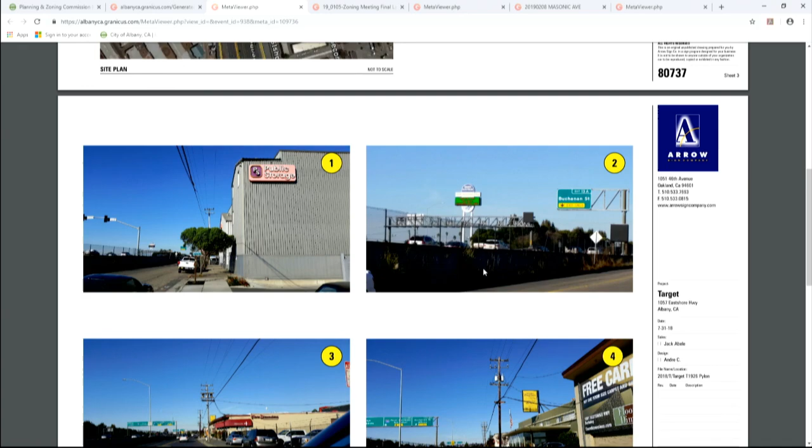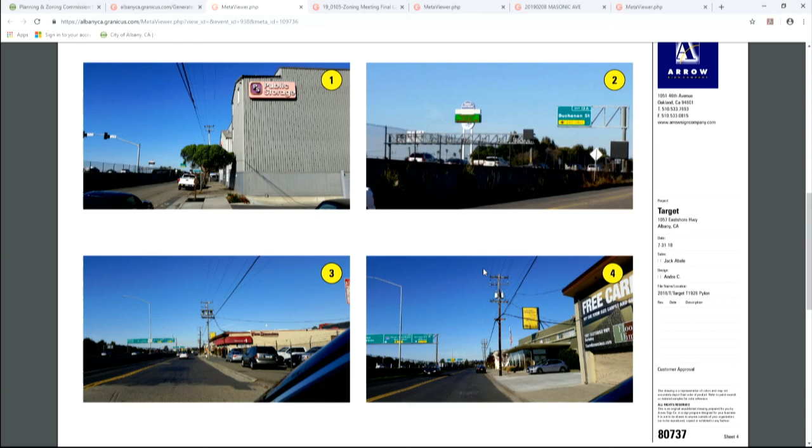Okay, yeah, here's the public storage building. As one is traveling along, that building effectively blocks that whole frontage of Target. You can barely see the red at the front of it, let alone the back. Again, as one travels up Eastshore, all of these frontage buildings right along the street block any visibility of the existing sign. Coming from the south, you have a good opportunity to see the store, but you're past it before you realize you needed to exit.

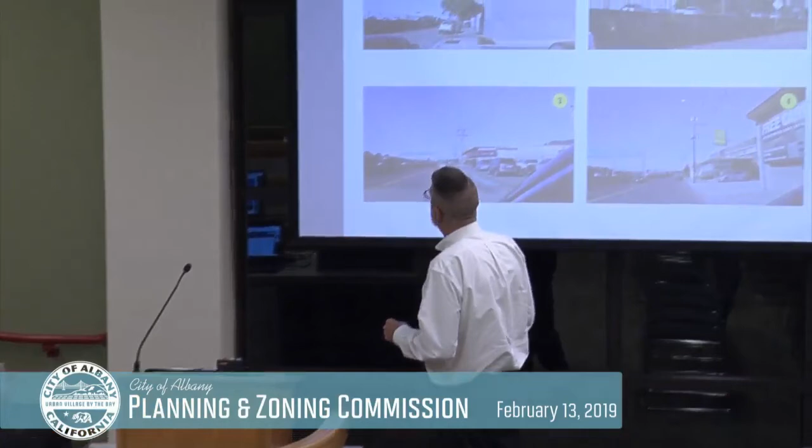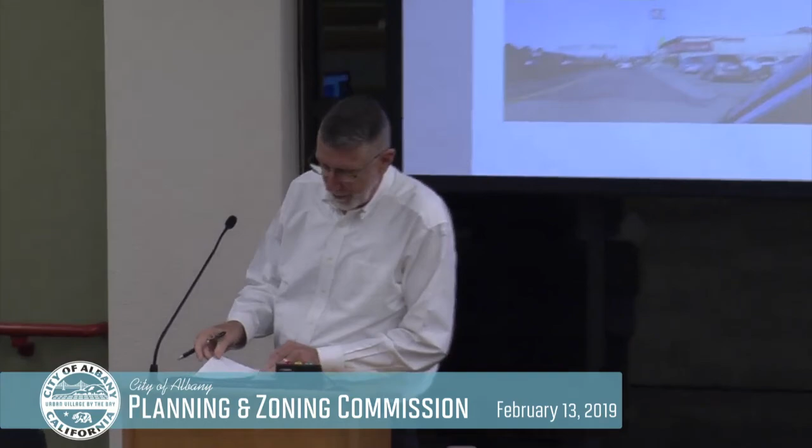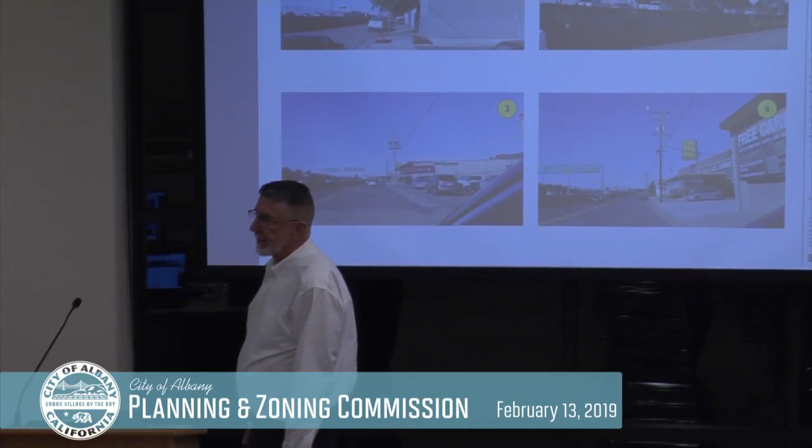So you're going to be dealing with the Gilman interchange, and we'd like some element that creates a focus so you can direct yourself towards the site. We're not trying to be what the racetrack has in signage height or anything like that, that's not our intention. Those street lights near the frontage, near the entry, are probably 25 to 35 feet tall, so I don't think we're being excessive going at 50. We're just slightly above those so they have a clear view over the two-story buildings along the frontage.

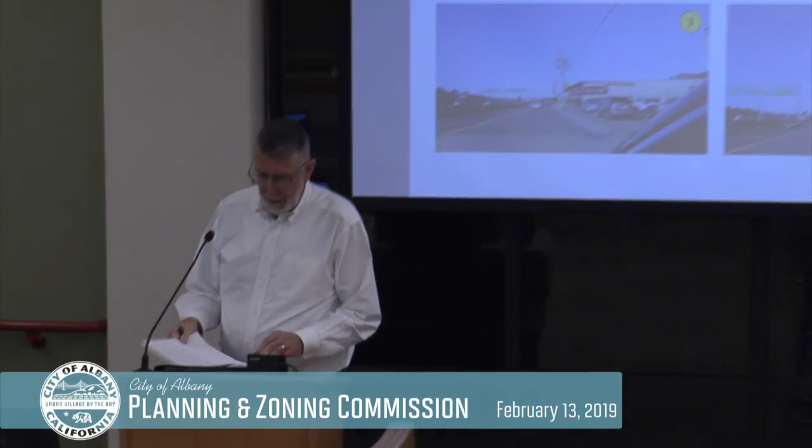We can address any technical questions about the signage. We have Jack Abel from Aero Signs here to answer anything you might have. And really, that's Target's intention, trying to be proactive for future changes along the frontage and maintain their visibility and sales so that their tax base stays up.

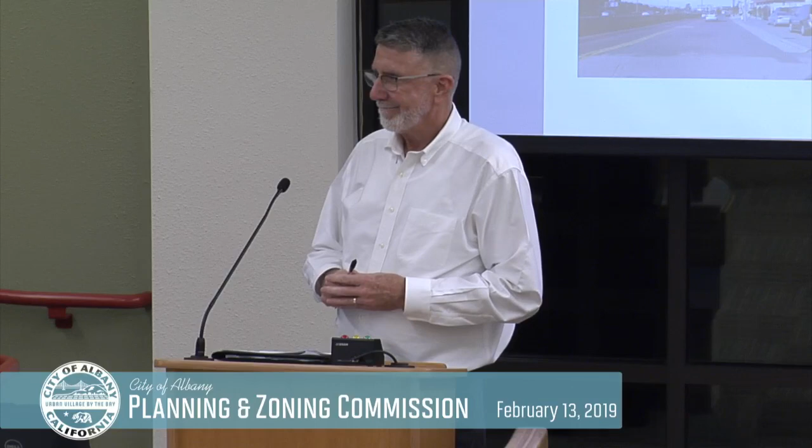Any questions? That store is not underperforming, is it? I wouldn't say it's underperforming, but I think it could perform better.

I think part of what you're hearing from us is that we recognize things may be changing, but there's nothing immediate. We just heard the Gilman interchange stuff, and there may not be shovels in the ground for many years. I understand there's also a proposal to jack up the height of the buildings on the front side, and if there were, I think that's a fact that would be very compelling to allow Target to increase its signage. So I think those are things we can deal with, but just in the abstract, the idea of putting up a 50-foot sign just to have better visibility, I think we probably need something more compelling, and the height is still probably a concern.

So what I would like to see is these photos and some other photos with that sign superimposed, so we can understand what we're actually talking about here. Again, I personally am in favor of allowing you to have signage so that people can exit the freeway and decide to spend their dollars here before they get up to Pinole, or Richmond. But I would like to tend toward the minimal approach that gets us that visibility without overkill.